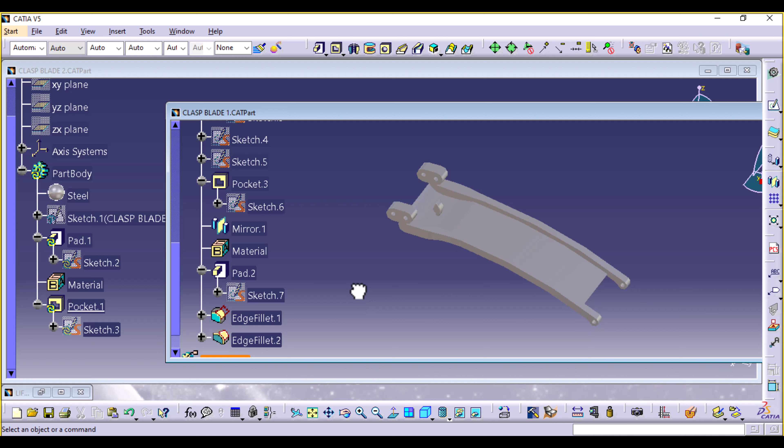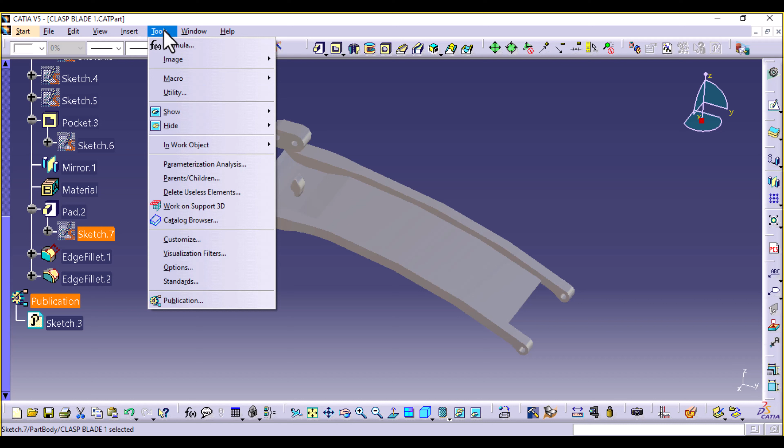There's a couple of sketches that we need to publish because we need everything to align correctly when we are locking this clasp. We had published sketch 3. We're also going to publish the last sketch that we made, which is the one that created this hook pad. Select it, then go to Tools, Publication, select Yes and OK.

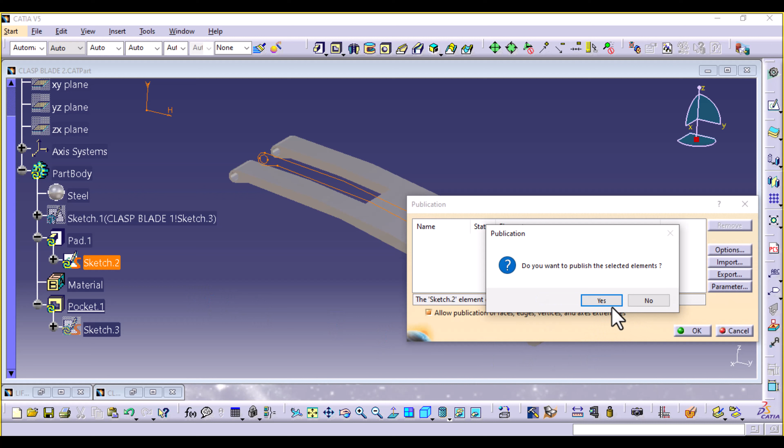And then go to Clasp Blade 2, and select the first sketch that you made, that sketch. Go to Tools, Publication, Yes and OK. So you have 3 published sketches in total. I'm going to hide this.

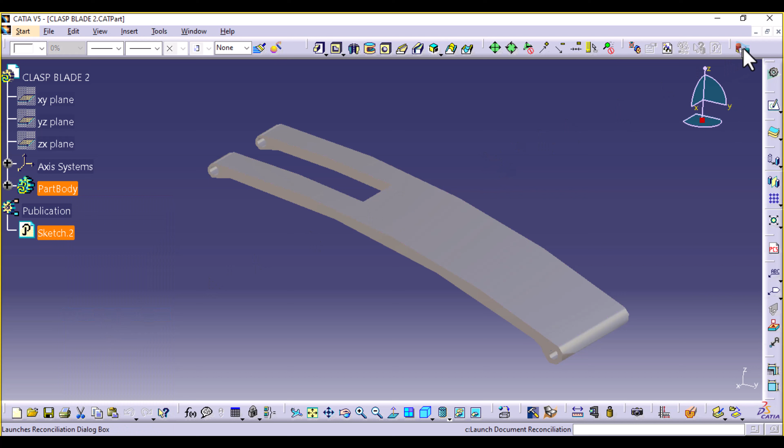Then you're going to copy all 3 and insert them in our new part design. I'm going to copy it, then paste it here using link, as paste special, result with link. Select OK. Then go to clasp blade 1 and copy the 2 sketches.

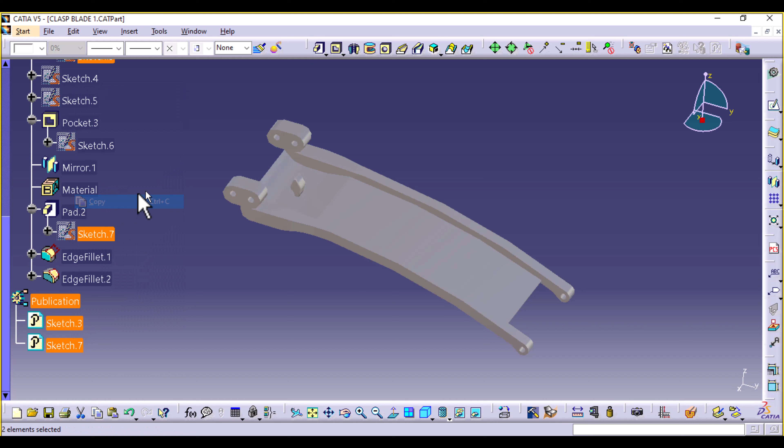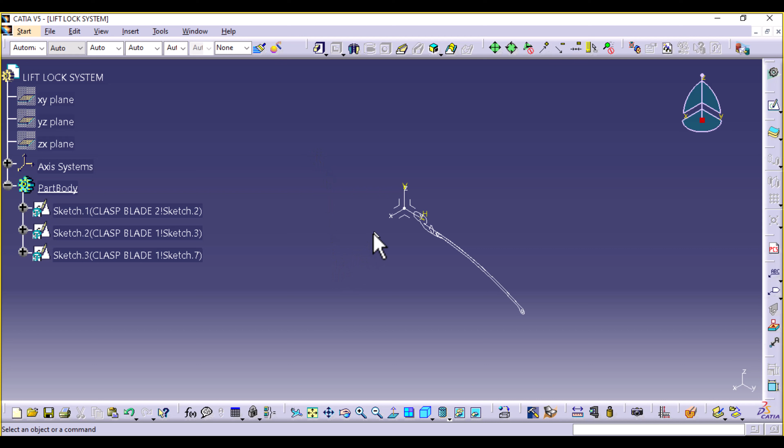Paste them there. Then you can show them now - go to Tools, Show All Sketches. If you select the YZ plane and sketch, you can see we have an outline of how everything looks when it is closed up. It's like a side view of the clasp.

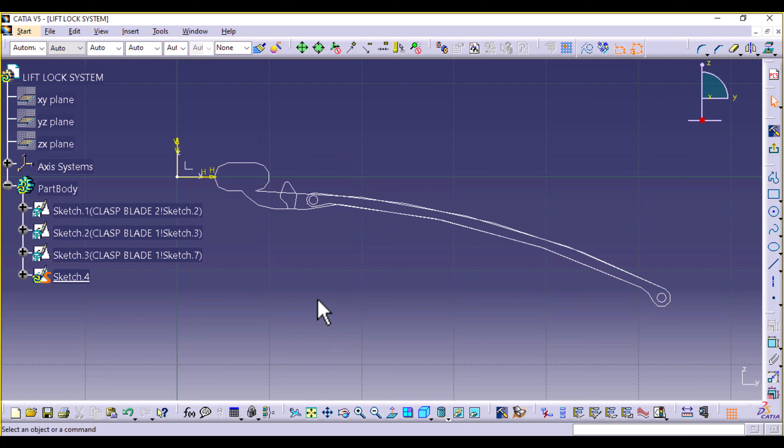So now we need to make the top locking mechanism here. There's a cover here, and there is also a last cover at the very front. So we're going to start with the locking mechanism.

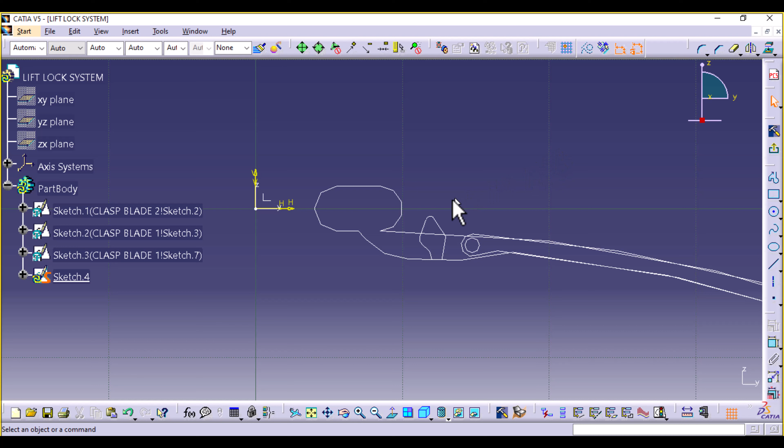We need to project a few sketches here, and I need you to know that I don't want you to highlight the sketch like this, because when you select a sketch like this and project it, when you go to select individual lines or curves, it just selects the whole thing. So the best way to do it is just select everything individually.

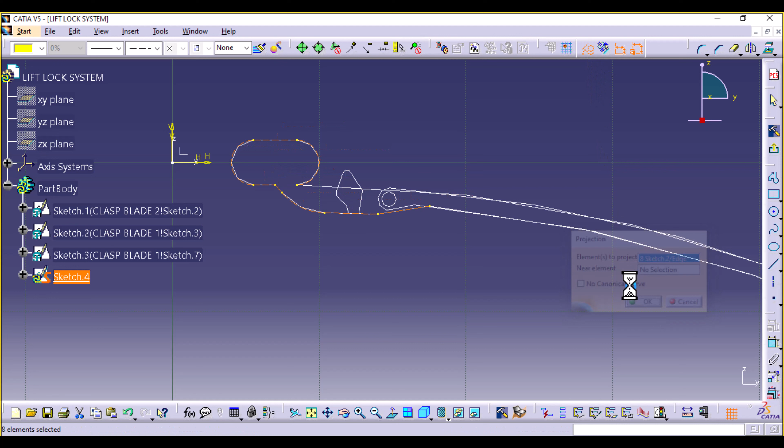So we're not going to project everything, we just need this outline like so. Project element as construction elements and select OK. Then now you can hide this sketch 1 - I think it was the second one.

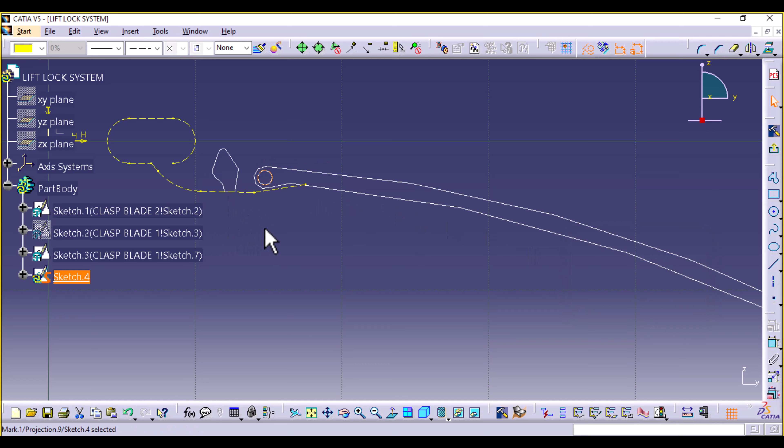Then for the second sketch, I'm going to project this circle because I need to use its center. We're going to hide sketch 3 - we're not using it for this particular sketch, but we're going to use it for the next.

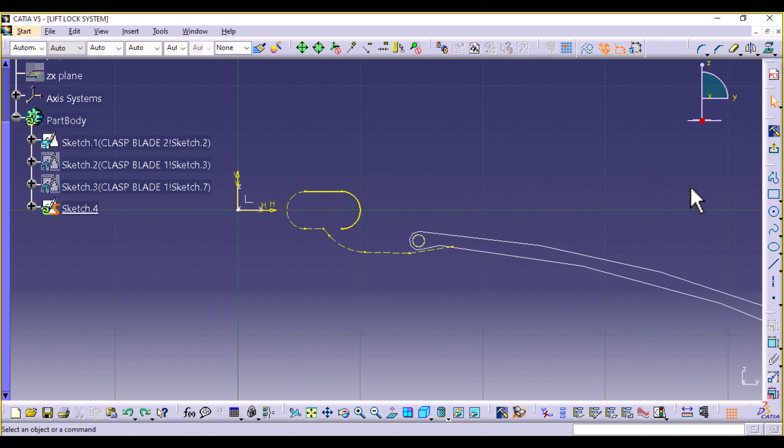All right, now that we have this, the locking system is just sitting right along this curve. So I'm going to start by selecting this line and this curve and make those standard elements so I can reuse them. And then you're going to select circle and create a large circle.

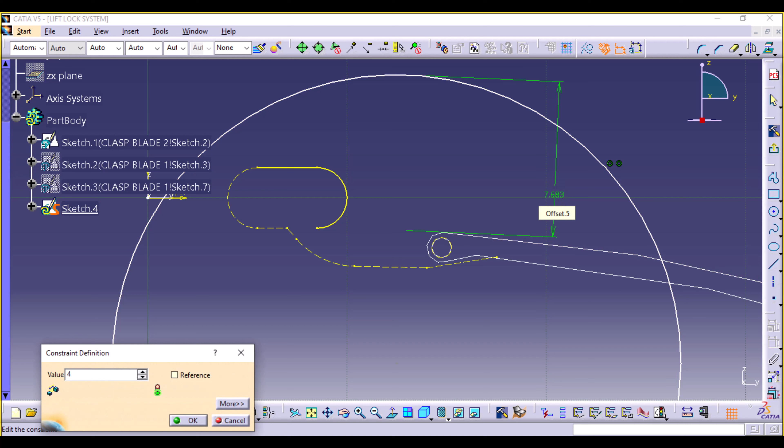Which is above this sketch. Then double click on constraint. Between this circle and this curve, the distance is going to be 4 millimeters. And we're also going to make both of these curves concentric.

Repeat the same, but this time make sure the circle is below the curve you made. Double click on constraint, the distance between this one and the first one is 1 millimeter, and both of them are also concentric.

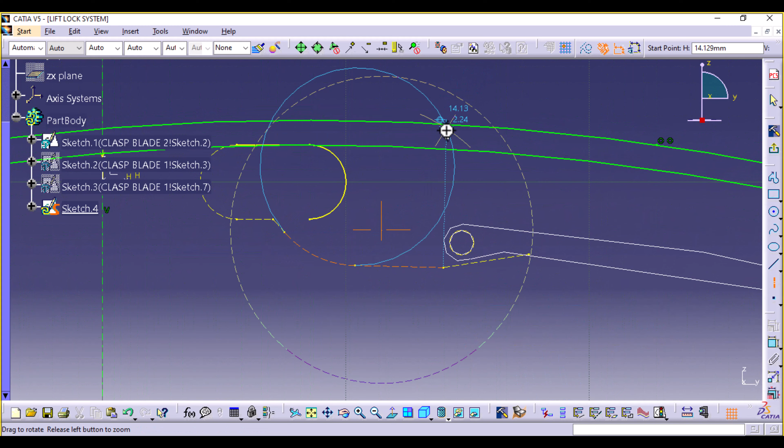All right, now we're going to create some axes. So double click on axis. The first one is going to be about this point. We can create another one along this vertical axis. And remember that circle that we projected, we're going to use it to create another axis aligning at the middle.

Like so. Then lastly, another one about this point.

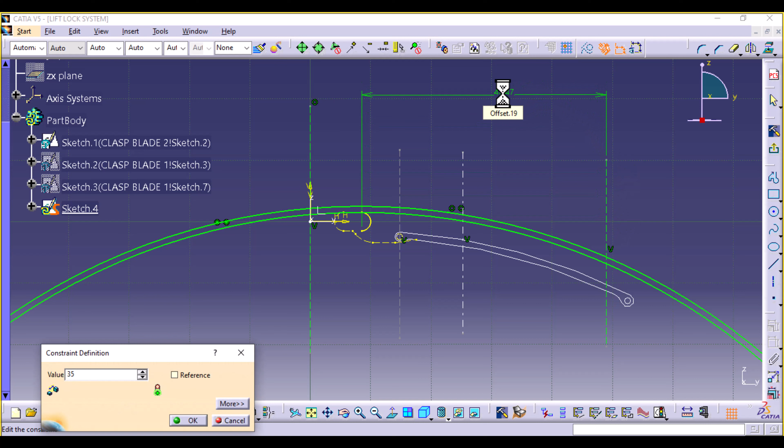Now let's define the dimensions. Double click on constraint. The distance between this point, which is along the center of this curve, and this first axis that we created is going to be 35, and that is the total length of the clasp cover. And then the distance between these two is going to be 7.

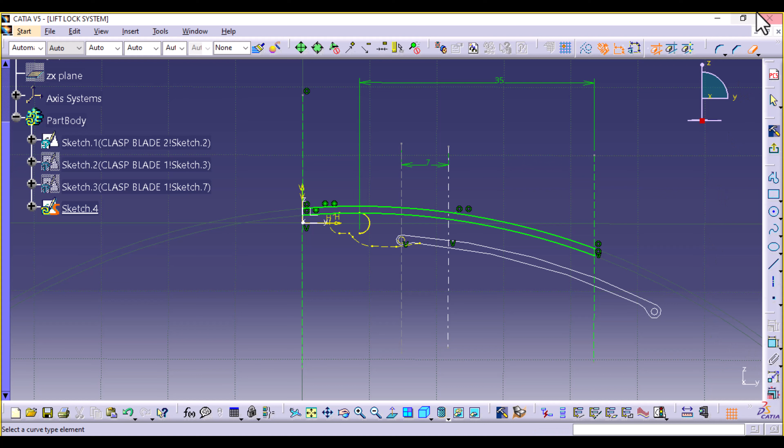And this is where the lift lock system ends, and this is just along this vertical axis. Then you're going to select quick trim. Trim off this second one and the first one, so we are only left with a segment of the curves. Then exit the trimming option.

Now we can create this, oh I see this one is moving, so we need to align it with the center of this curve. Once I put it there, I can fix it. You can select it, go to constraint and fix it so it doesn't move. All right, so far so good.

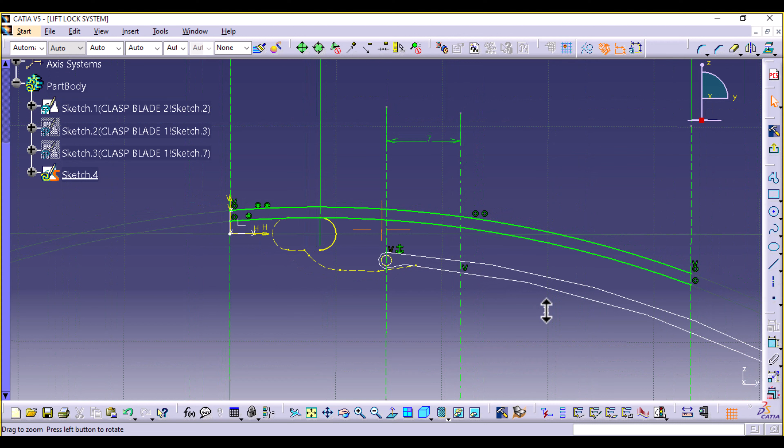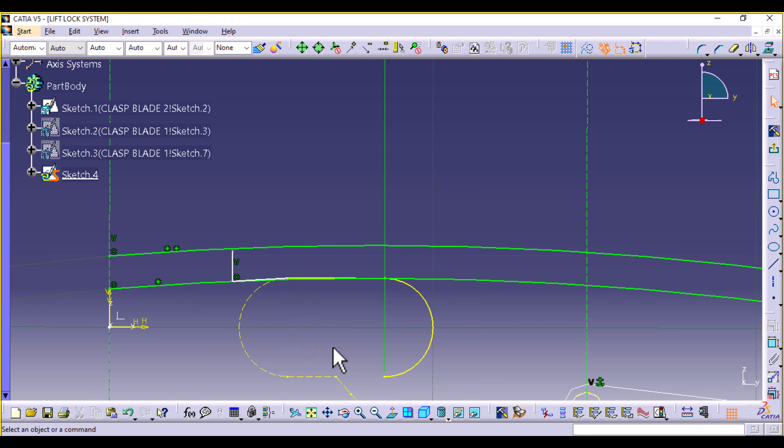Now let's select profile and create the profile so it's going to end at this point. So you're going to start by dropping a line, vertical line like so, and it's going to join to that profile that you projected.

Then select profile once again, and from this midpoint you're going to drop a vertical line which aligns with the horizontal line here, so like so. Then bring it to about this point, then up to this axis and touching that curve, then exit profile.

Then lastly, you're going to create a line from the top curve, a diagonal line, to the bottom curve, and I don't need to create any accidental constraints. So that's the profile. You can select quick trim and trim off this arc.

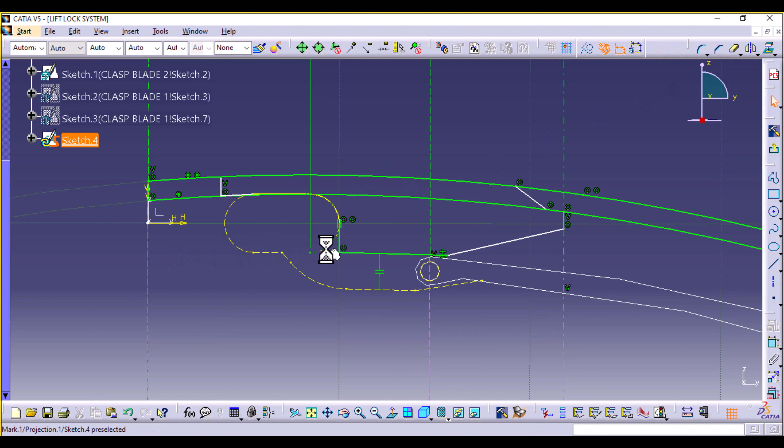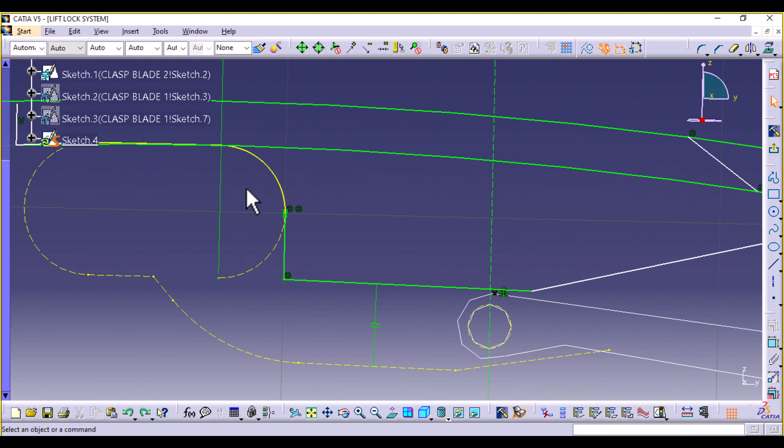We can trim the elements at the very end here. Exit. I'm going to undo the last move because I need it to end at this point. So this point and this line need to be coincident, and that way I can trim off this top part.

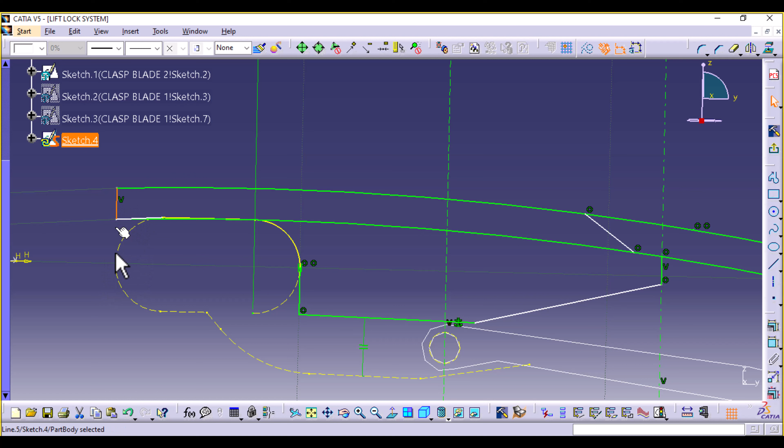All right, that's good. You can try to move this line until you see this tangency option here, so that means they are aligning, but that's optional. You can estimate up to where it ends, it doesn't need to be exactly at this point, but somewhere close by.

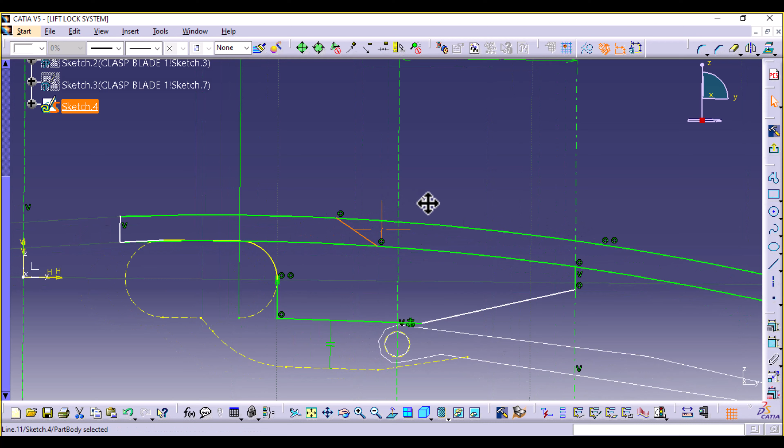This line actually is at the wrong point, you're going to drag it. It's before this axis, not the last axis, before this second axis. And we're going to create some corners, so select corner.

Between these two, we're going to make this radius 2. Another corner between the top and the bottom, and the diagonal line, I mean, and this is going to be 2.5.

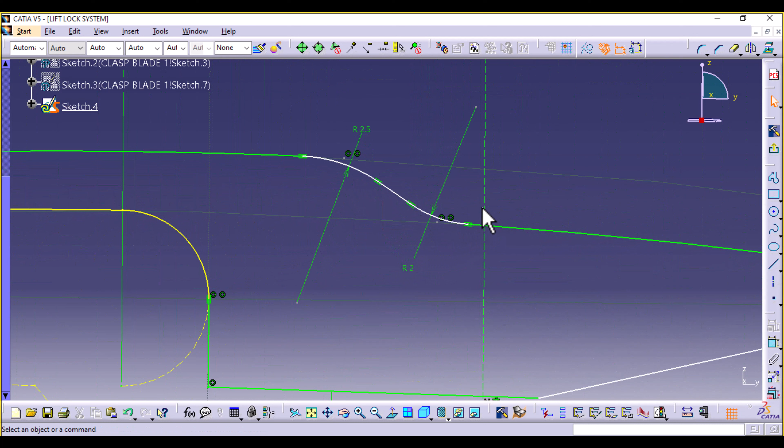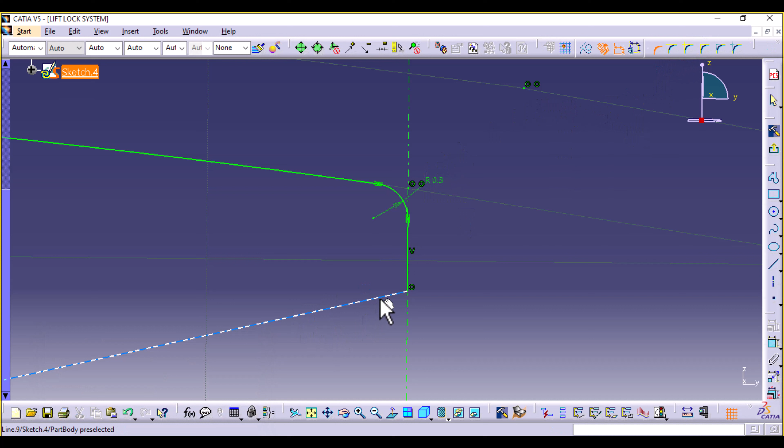So it's almost touching this vertical axis here. Then at the very end, we're going to make 2 corners which are 0.3 in radius. So select those 2, this is 0.3 at the bottom, this is also 0.3.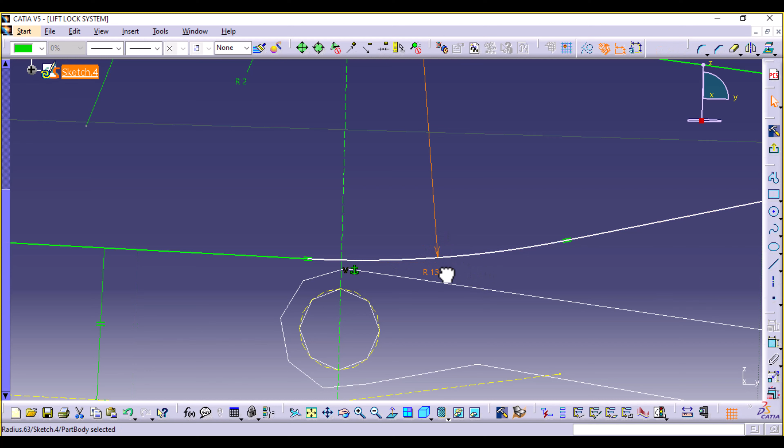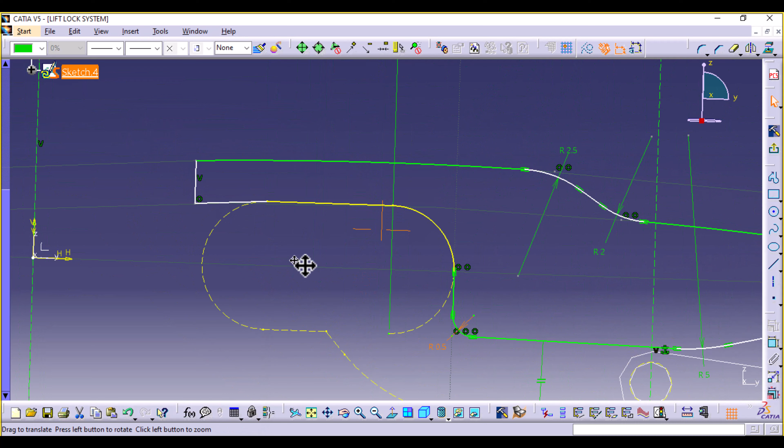Here we're going to make a corner which is about 5 in radius. And at this corner we need another curve corner, I mean, this is 0.5. And another 2 here, 0.3, 0.3, so this is 0.3, bottom one same thing.

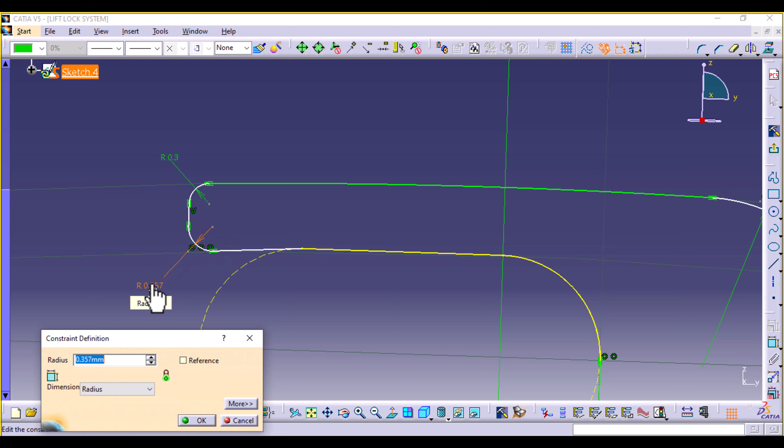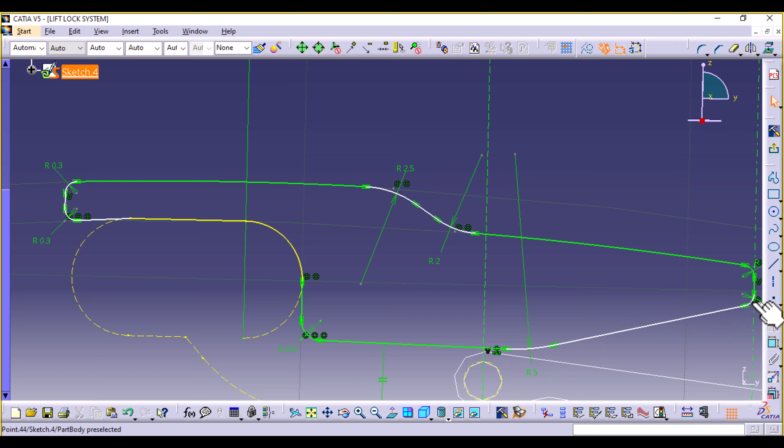All right, so this is the profile, the outer profile. As you can see here, the line came just bypass this circle a little bit, and then you can go upwards. This thickness, you can just estimate it, not very important as well.

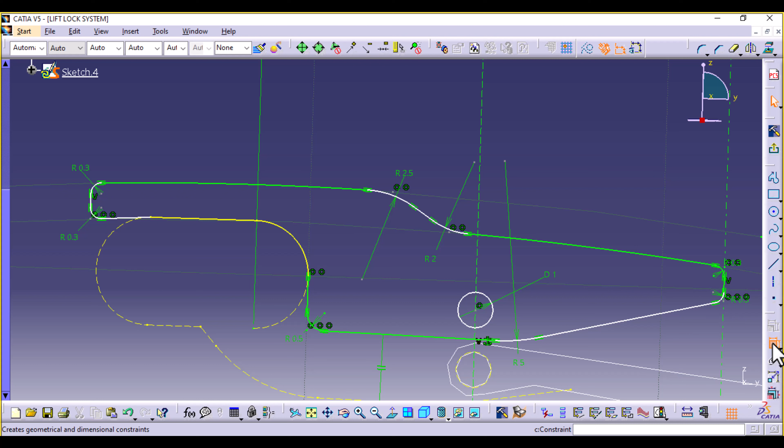And lastly, we're going to create a circle because we're going to have a hole here going all the way through. So along this axis, you're going to create a circle. It's going to be 0.5 in radius, so diameter is 1. And then the distance between the center of that circle and this top line is going to be 2.5. Or if you select this bottom line, it's going to be 0.5 because this distance is 3. So I'm going to select the top one, and that distance is going to be 2.5.

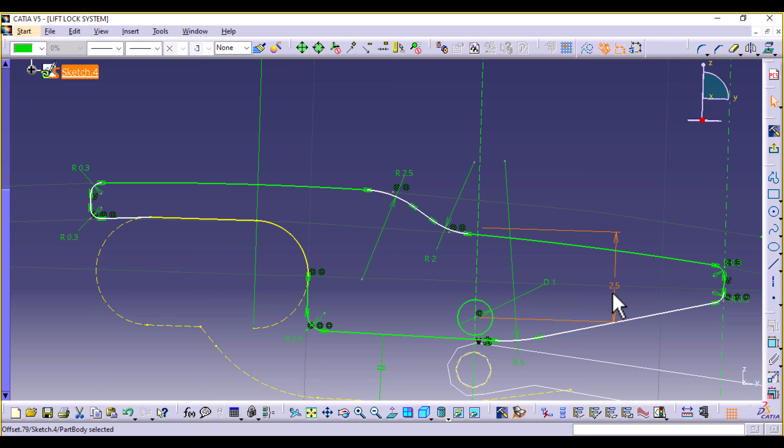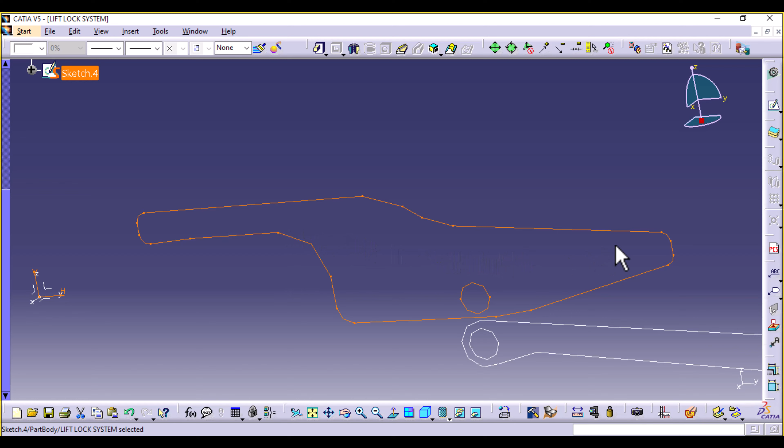All right, so far so good. So if you've done that, our profile is now complete for the outer body. So you can exit the workbench, and you need to inspect your geometry for any double point. If you ever see any double points where they are attaching, you know there's a problem, but if they're just single points, then you're good to go.

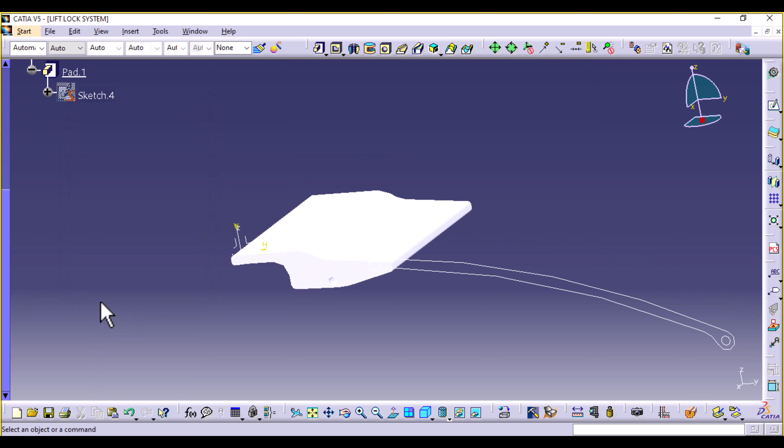So you're going to select that sketch and create a pad which is 20 millimeters, but because you're using mirrored extent, it's going to be 10 millimeters each side. Preview, select OK. I'm going to use the same color I use all the time, the gray color.

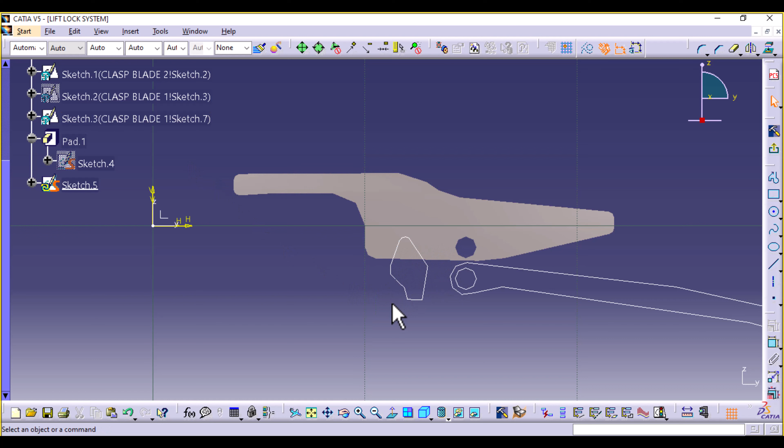And then we are going once again to sketch the ZY plane. And I'm going to show the third sketch that we had. Matter of fact, I'm going to show all the sketches. So I need to create the profile that's going to hook here.

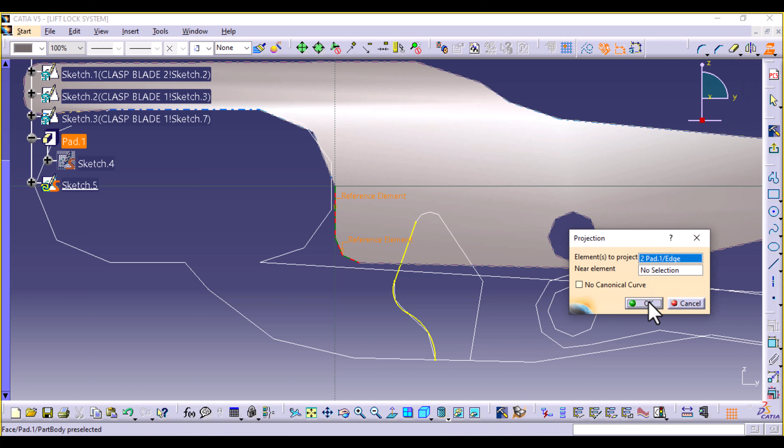And you can start by selecting this side of the profile and projecting it as standard element. Same thing with this line, this edge, and this corner. We're going to project them as standard elements. Then join the top with a line.

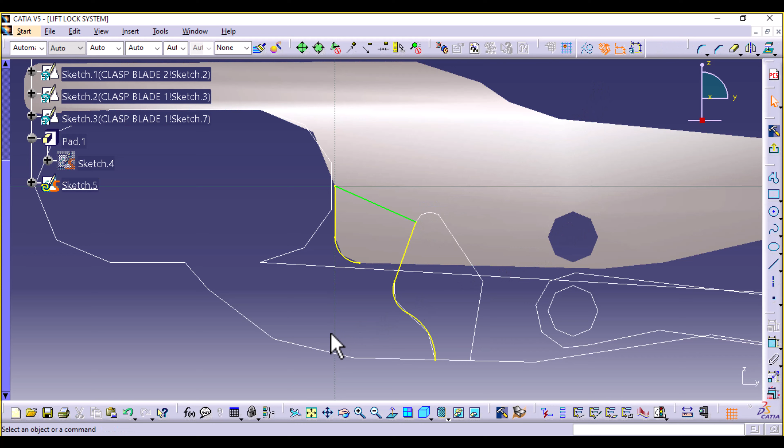Select line. I need to make sure I'm selecting, connecting the two profiles. And then for the bottom profile, now right here, we're going to create a circle. So on this space, I'm going to create a circle which is touching this arc about that point. So we have tangency there.

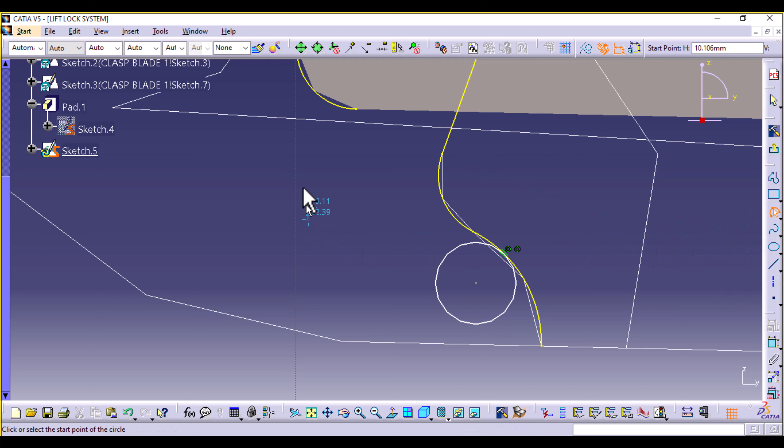And then I'm going to select 3-point arc starting with 2 limits, and then select this point and this arc, draw out an arc. Select constraint. We need to give this a diameter and this one a radius. And then between this and this, we're going to have tangency. That's on the wrong side. Let me undo that. I need tangency on this side.

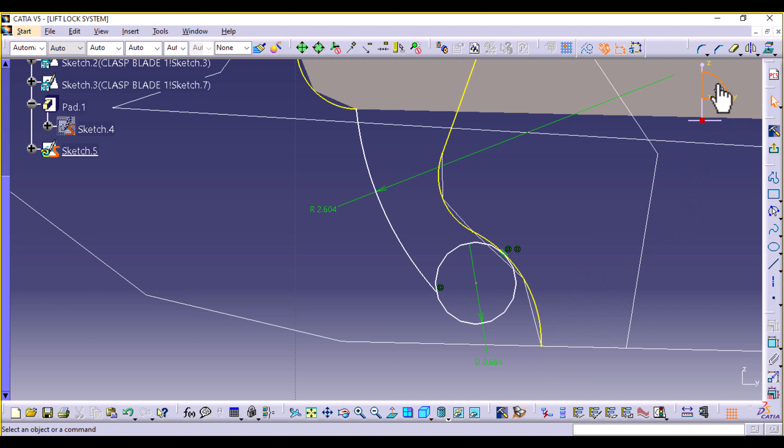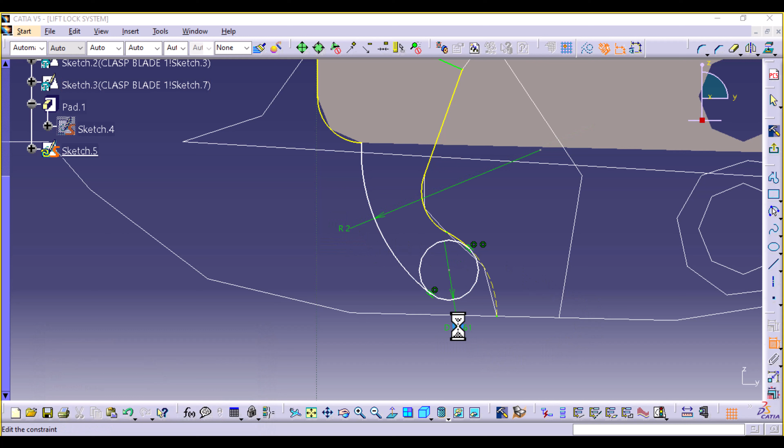So first, maybe I can trim off this arc so that it's only touching this point. And then we can try the tangency once again between this and this. Tangency. Perfect. So this radius is going to be 2. And then this one is going to be 0.6.

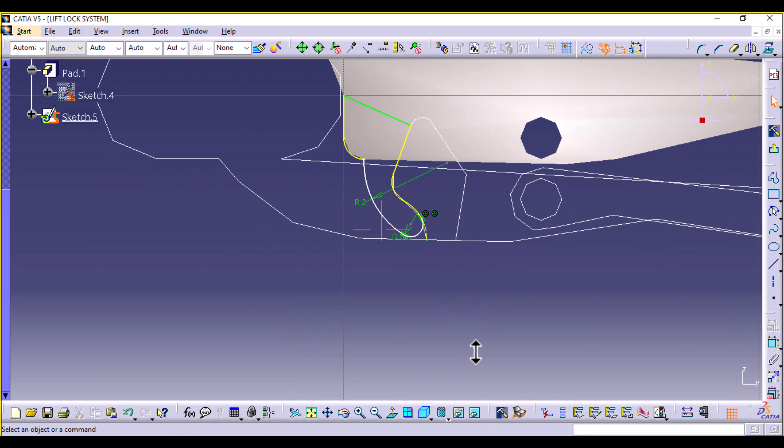So we have that, and then you're going to trim off this excess curve. So you can see this profile is going to fit right into this slot, and it also doesn't go below this bottom profile. Because remember, along this curve, that's where our profile is ending, the pocket. All right, that looks good. So we're going to exit.

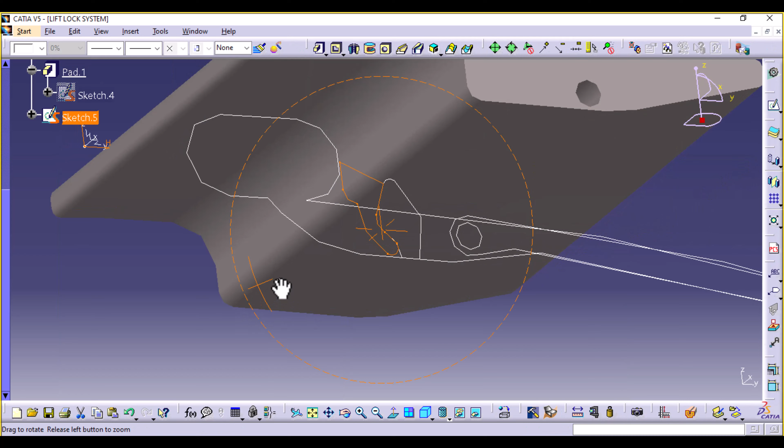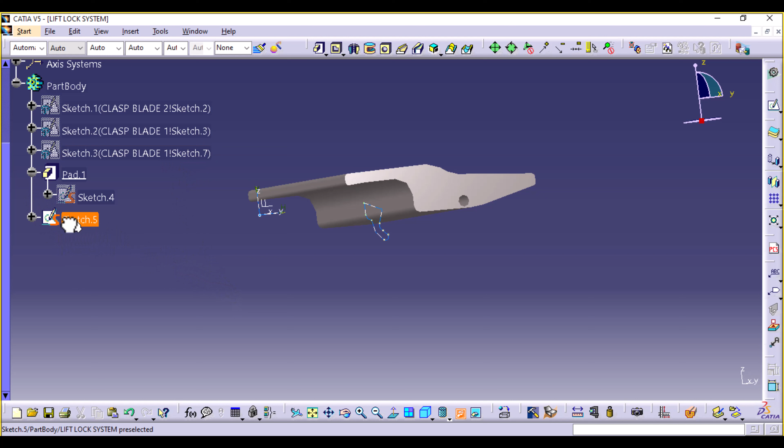And you're going to create a pad. So let's hide the sketches first, and leave the only sketch that we have created. So we're going to create a pad which is 2 millimeters, so 1 millimeter mirrored extent. And this is the sketch that we are using. Preview, select OK.

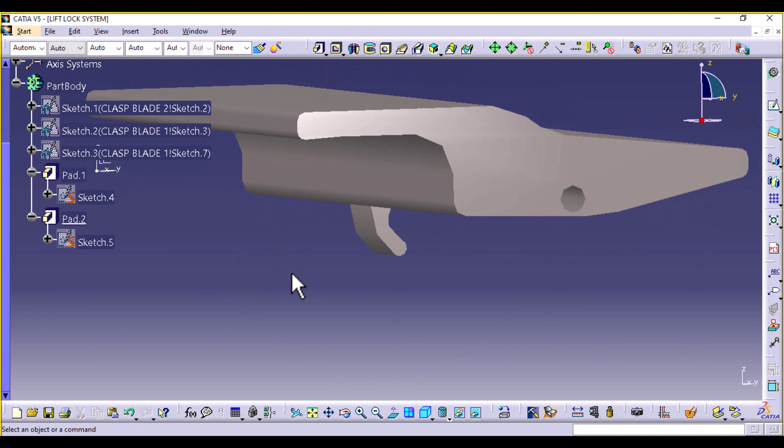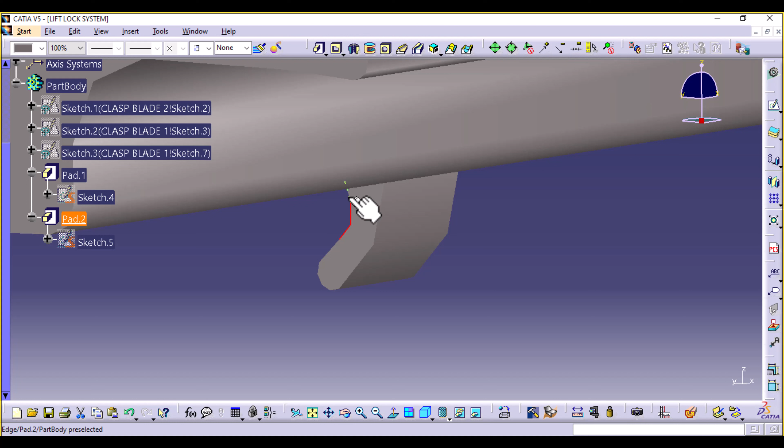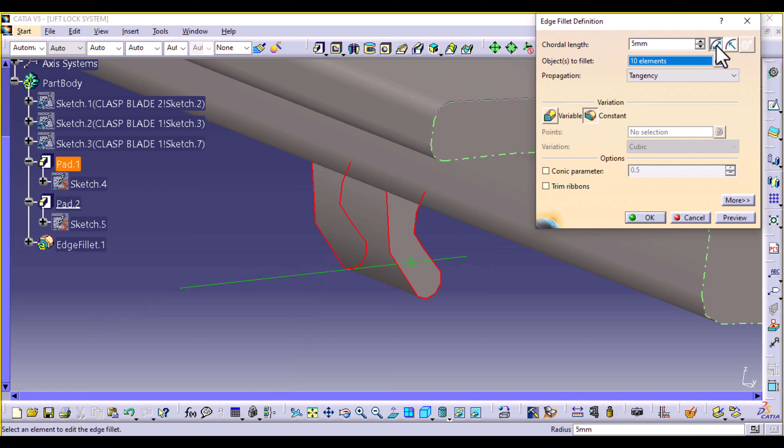And we're going to insert some edge fillets. So just select these edges. Like so. And on this side as well. I've released them. I'm going to select them once again. Then insert edge fillet. We're going to select chordal length so that material removed is even from each section along these edges. And we're going to have 0.2. Preview and select OK.

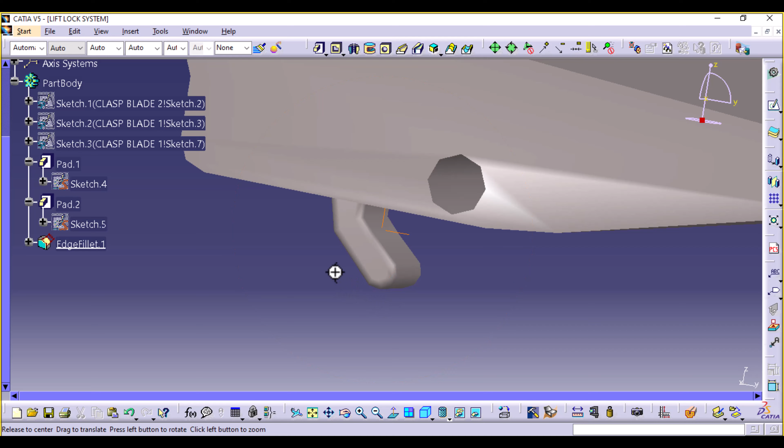All right, now we need to eat away a section here where we're going to attach the hinging part. So you're going to select ZY plane once again, sketch, select a rectangle, and along this horizontal axis you're going to drop a rectangle going all the way to the very end, and then select constraint, the distance between this line and this edge is going to be 1.5.

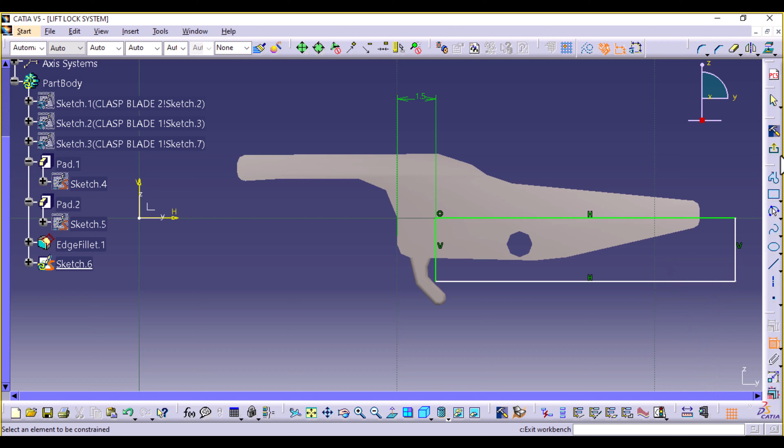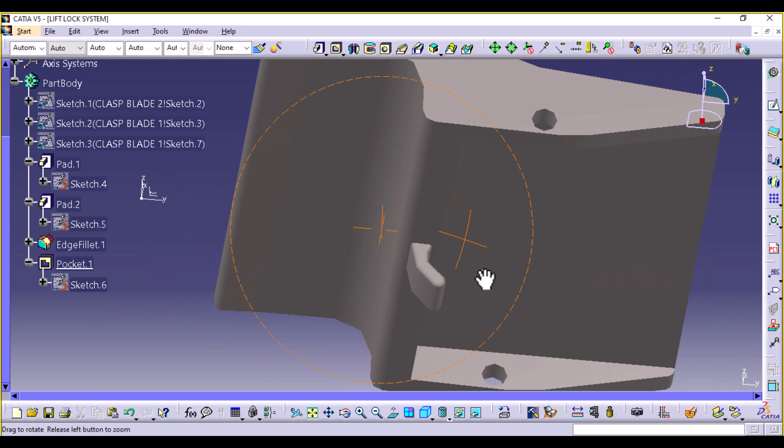Then exit and create a pocket. It's going to be 9 millimeters on each side, so we are only leaving 1 millimeter on each side, and select OK. So now we have that pocket. Then we're going to assign a material. Same as others, it's going to be steel.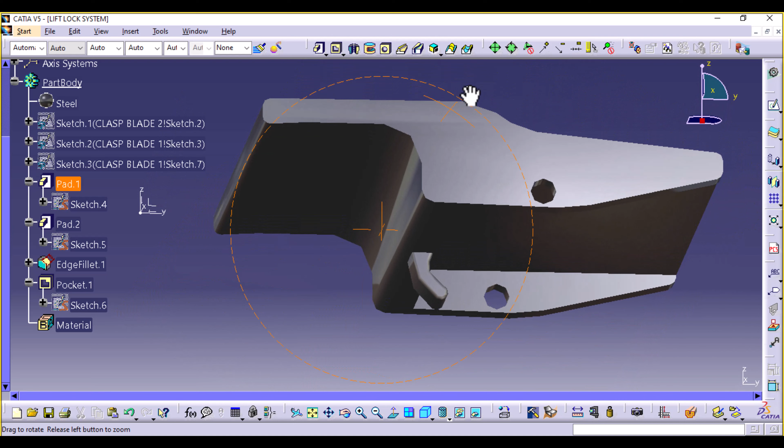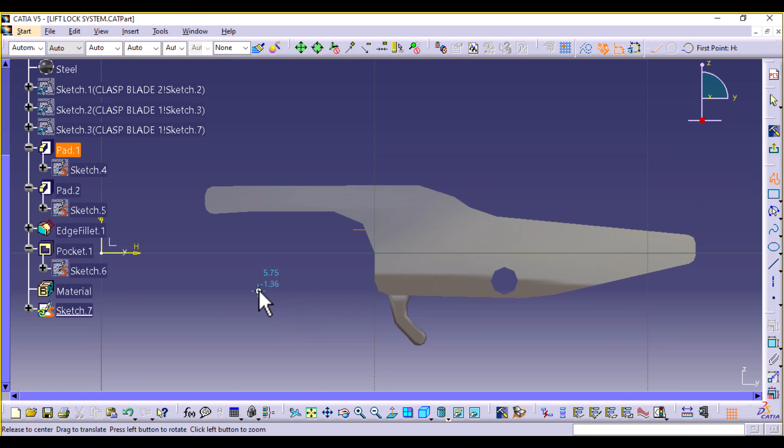And actually we need to create a profile up here. Yeah, just remembered. Select YZ plane and sketch. And you're going to select profile. Then right about this point where this curve ends, inside the profile, you're going to select your first point. Then it's diagonal going outwards. Undo that. I need to bring it up.

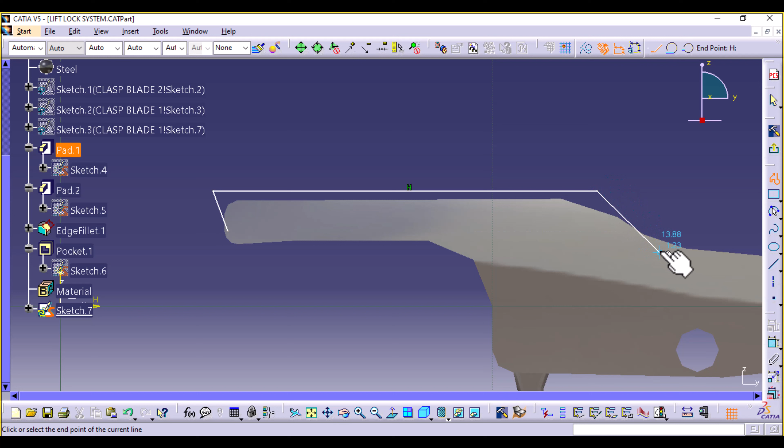So profile, starting about this point, it's going up, and then we have a horizontal line up to about this point, and then it goes down into the profile and connect back. Then the distance between this horizontal line and this edge is going to be 0.1.

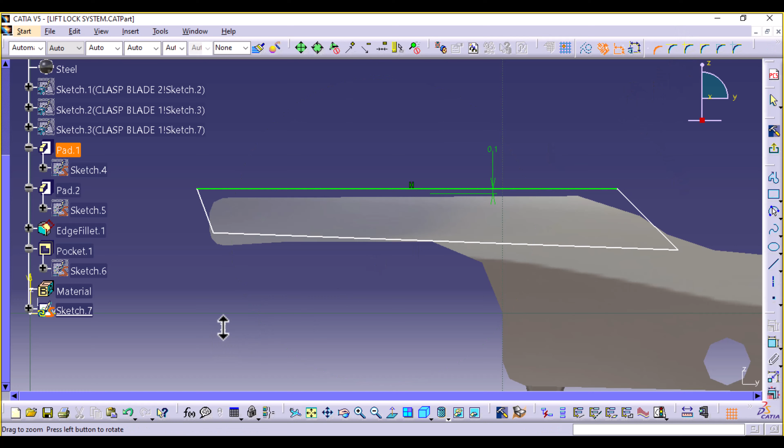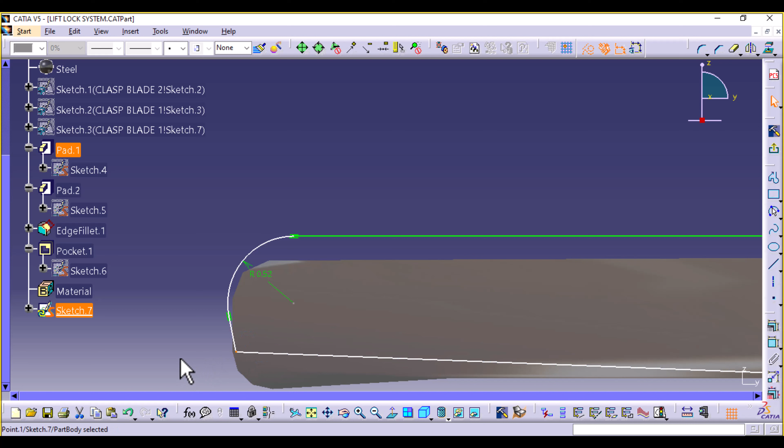Now we can add corners, starting with this corner here. So about that point, it needs to look as if it's projecting from here going upwards. So this one we can bring it close to the surface, like so. And at this point it's also going to blend in. Like that. So you can adjust it, bring this closer to the surface so it blends in with this other curve. Then exit.

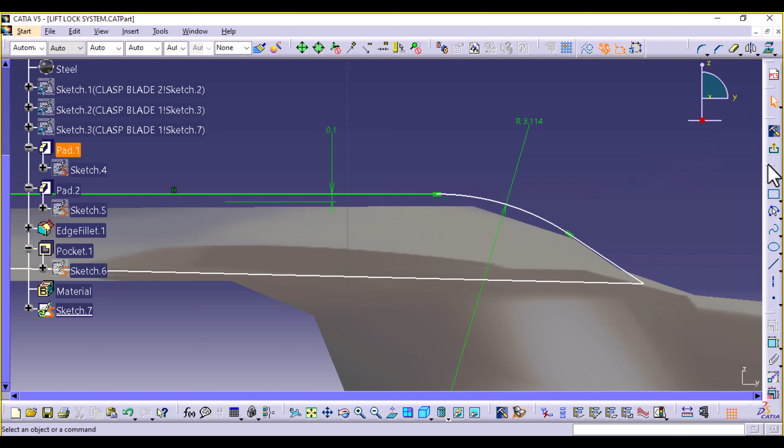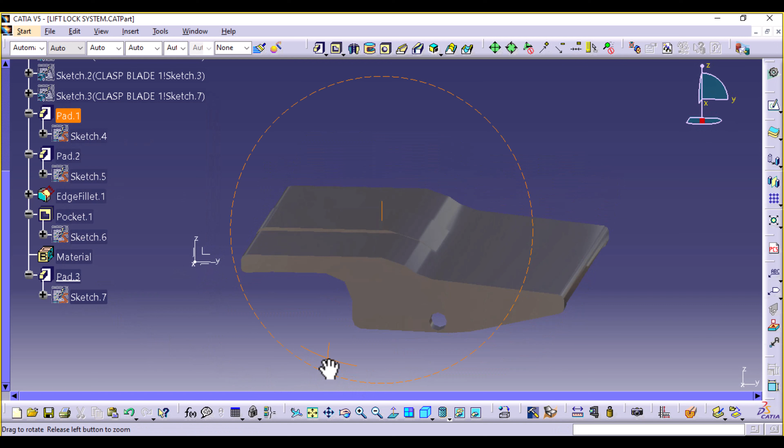So select pad, mirrored extent, each side is 3, and this is the sketch we are referring to. Preview and select OK. So we have that raised portion that blends in as you go down, and it's the same case on this side.

Then you're going to select that sketch that you just made and you're going to publish it because we're going to reuse it. Select OK, as well as this first sketch. Publish it. Sorry, it's sketch 4. Publish it and select OK. So these two, once again, we are going to reuse them. So save your work.

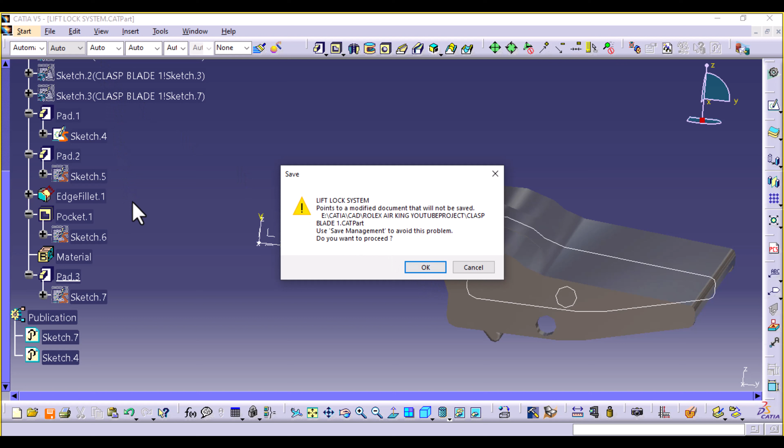Select OK. This is referring to the published sketches that we imported here, and select OK. We can hide this sketch now. And our part is done. We can't assemble this until we make the top cover because they are usually attached together. And then there's another part where you're going to attach the top clasp.

So let's go make the top cover in the next episode, and I will see you there.